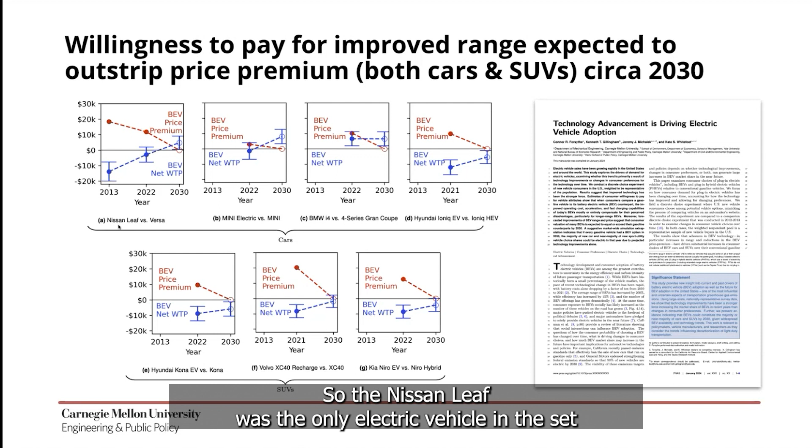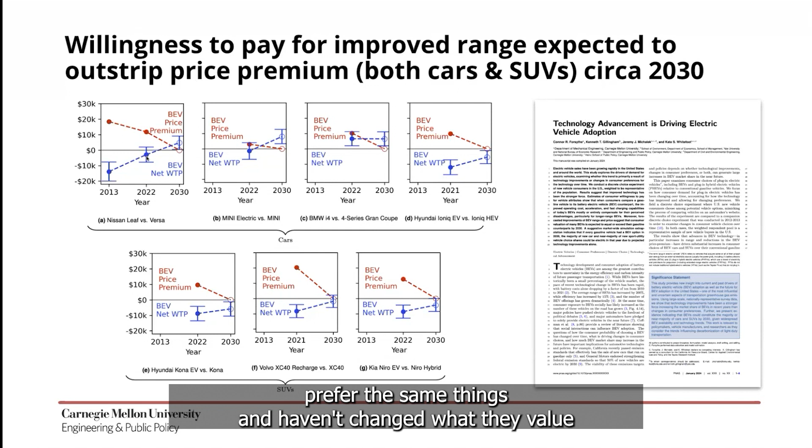So we did that with a bunch of specific vehicles and then for the full market. So the Nissan Leaf was the only electric vehicle in the set that was available back when we were doing the original study. And it improved from 2013 to 2022, even if the consumers prefer the same things and haven't changed what they value and what they're willing to pay for. Just the fact that the range has gone up and the cost has gone down increases the willingness to pay. The range going up increases the willingness to pay, and the cost coming down makes less of a gap.

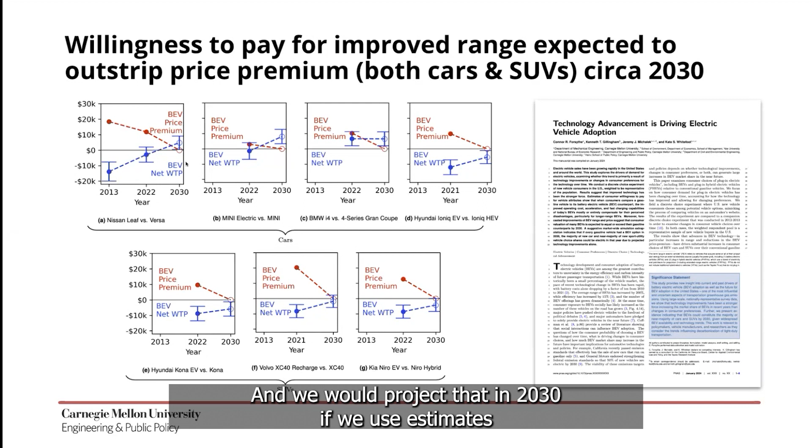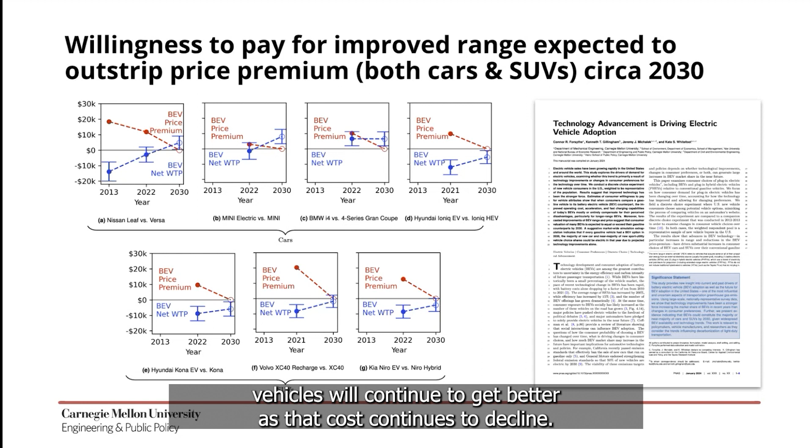And we would project that in 2030, if we use estimates from a recent National Academy consensus report, that the attributes of electric vehicles will continue to get better as the cost continues to decline. And we see a crossover point happening where the average willingness to pay in the population starts to exceed the price premium, and you get a lot more adoption even without putting in subsidies.

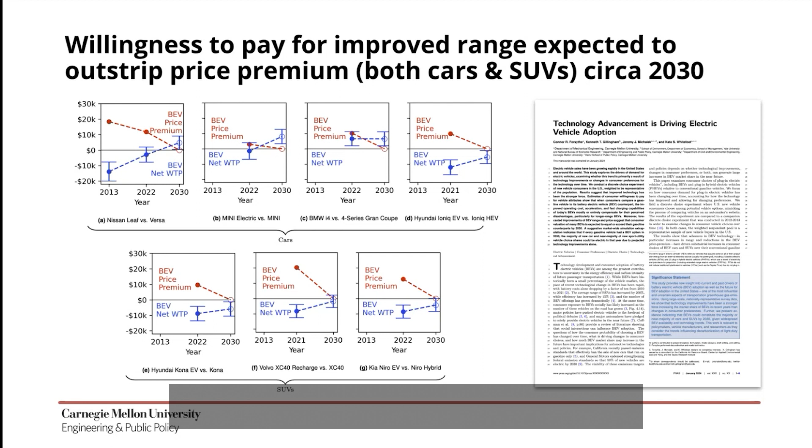And we looked across the entire market. Of course, what happens in the full market really depends on what kinds of electric vehicles are going to be available in the future and how many gasoline vehicles will continue to be available. So we just ran a scenario in which we assumed that every gasoline vehicle available would offer an electric version, and that the electric vehicle version would have attributes like what the National Academies project. Under that scenario and the preferences that we've measured, we see a majority or near majority of consumers of both cars and SUVs being interested to adopt electric vehicles.

We repeated the same exercise with pickup trucks, but this is a separate survey. We hadn't done the pickup trucks in 2013. We're just starting those now. Electric versions of pickup trucks have only just entered the market, and it's still too new to know what's going to happen using just market data alone. So we used, again, this controlled experiment approach. And what we do is once we get our responses, we use a latent class logit model, which is a way to categorize consumers based on patterns in their choices, not based on their demographics, but just based on similarities in what vehicles they're willing to choose over other vehicles.

And when we do this, we find that about 45% of our weighted respondents fall into a group that we call tech indifferent, because they don't really have strong preferences for electric over gasoline or gasoline over electric. If they offer the same attributes, they're pretty indifferent between the two technologies. So the key for this group is: is it offering better attributes? What's the range? What's the operating cost? What are the performance attributes? And for pickup trucks, things like hauling and towing capacity matter as well.

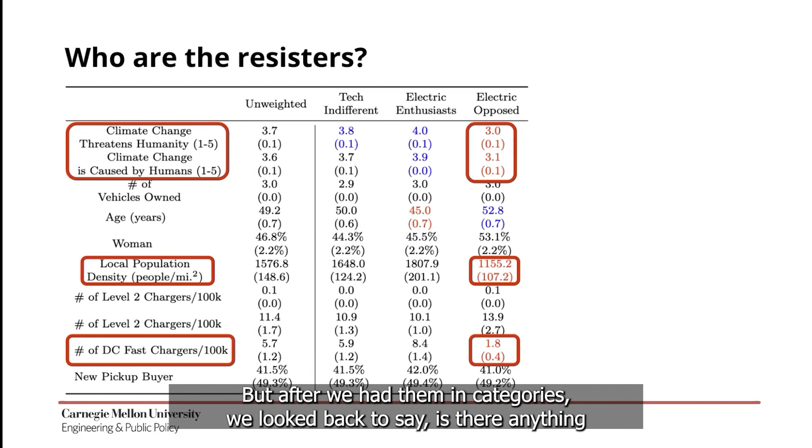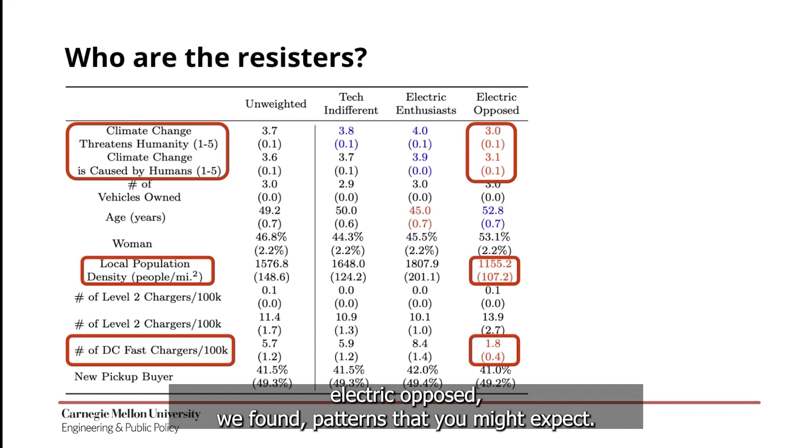And again, we didn't categorize these consumers based on their demographics. We categorized them based on the choices they made. But after we had them in categories, we looked back to say, is there anything in common about the consumers who fall into these categories? And for these electric opposed, we found patterns that you might expect. That group is much less likely to believe in climate change. They come from more rural areas, and there are fewer DC fast chargers in those neighborhoods.

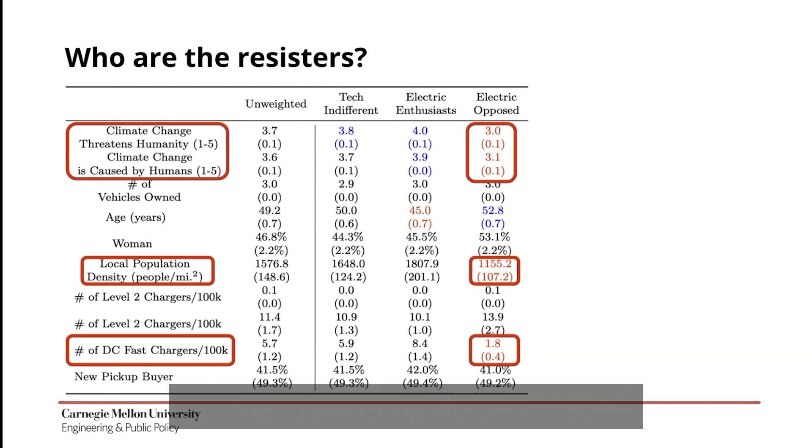And so maybe the one of those that we could have some control over is with the Inflation Reduction Act and the bipartisan infrastructure law and the rollout of new charging infrastructure. That may be a lever. I mean, it doesn't say causally that this will change anybody's mind, but that is certainly a factor that this group has in common. And so a change there could potentially be a factor that would sway some of these respondents.

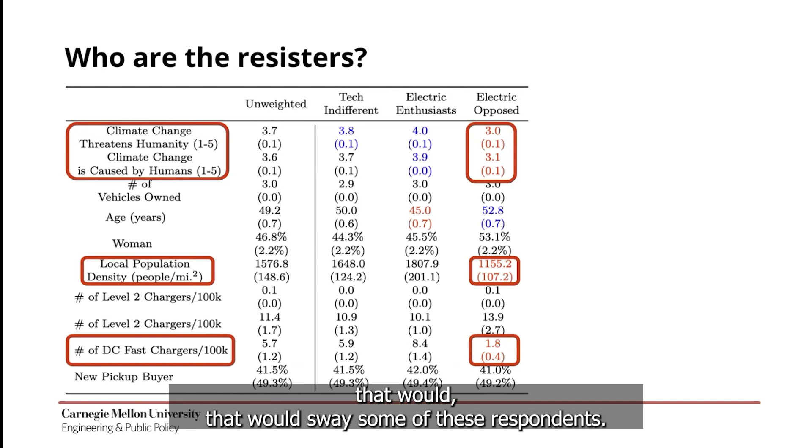So that was all for cars, trucks, and SUVs, which are bought by ordinary consumers. We've also been doing some work on electric delivery trucks. And for these, when you're buying a fleet of trucks, you're going to run the calculations, see what the net cost is going to be over the life. And so that's likely to be a bigger driver than kind of these willingness to pay weighing the attributes.

So we looked at economics, comparing diesel delivery trucks to electric delivery trucks in a bunch of different markets that differ in the geography, the kinds of deliveries they're doing, and what the tariff structure looks like, meaning how much electricity costs and how much the cost for electricity changes throughout the day. And so we find that electric delivery trucks can be competitive with diesel trucks today, but there's this really big bar in the first orange, electric unmanaged charging.

And the reason is because there's a lot of uncertainty. It really depends when you charge, where you charge. Is all the charging happening at the warehouse where you're loading up the goods? Is some of the charging happening along the route where you stop at a public charging station? And is it coordinated? Like, is all the charging at the warehouse happening right at the time that the warehouse has peak demand, and that will induce some demand charges from the power system?

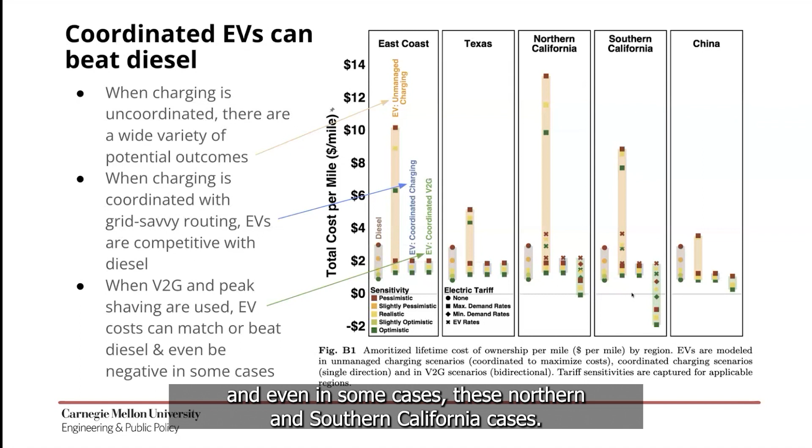And even in some cases, these Northern and Southern California cases, if you are strategic about when you charge and you use the vehicle to offset some of the facility's load right at the time that it's demanding its peak load, you can actually lower the demand charges from the power system, and you can end up with negative costs. This is from two things: from lowering the demand charges at the facilities where you're loading the goods, and also buying electricity at times that it's cheap and selling it back at times when it's expensive.

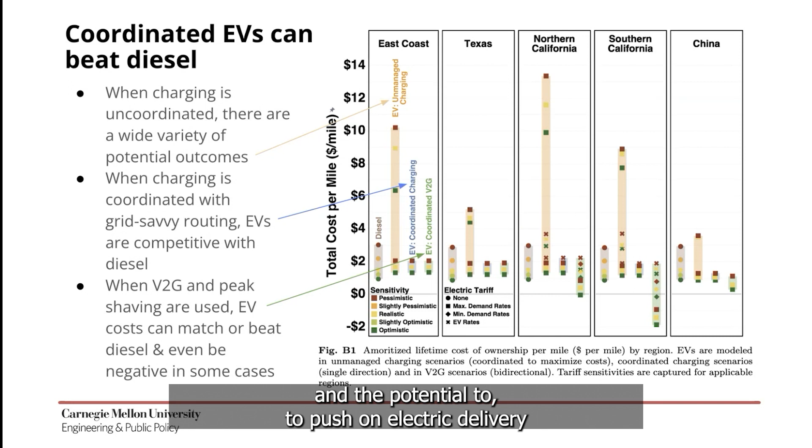And so this coordination of how you manage the delivery and the charging of an electric vehicle has a lot of potential benefits in some markets to even run at negative cost, where running the electric vehicle and doing the deliveries is free, and then you're getting all the revenue from the deliveries as well. So that points to both the importance of coordination and the potential to push on electric delivery in some of these markets first, where they could be particularly attractive.

Okay, and then the last topic I wanted to touch that's related to adoption is the EV battery resilience to fast charging. If you have an electric vehicle and you have a garage, most of us can install an electrical outlet in that garage and charge the electric vehicle there. And we won't really need public charging infrastructure very often, just kind of when we go on a long trip and we want to use a highway rest stop, that sort of thing.

But if you live in a multifamily dwelling, or even a single family dwelling that is in an urban area, you might be less likely to have any off-street parking. And if you don't, then you're going to rely on public charging infrastructure, which will probably include a lot of fast chargers, because those are the only ways to get your car fueled up at a speed that's anything like gasoline. So we have been testing a bunch of battery cells to see how they perform when you charge them really fast. There are three major types of lithium-ion battery chemistries used in electric vehicles today: LFP, which is lithium iron phosphate, NCA, which is nickel cobalt aluminum, and NMC, which is nickel manganese cobalt.

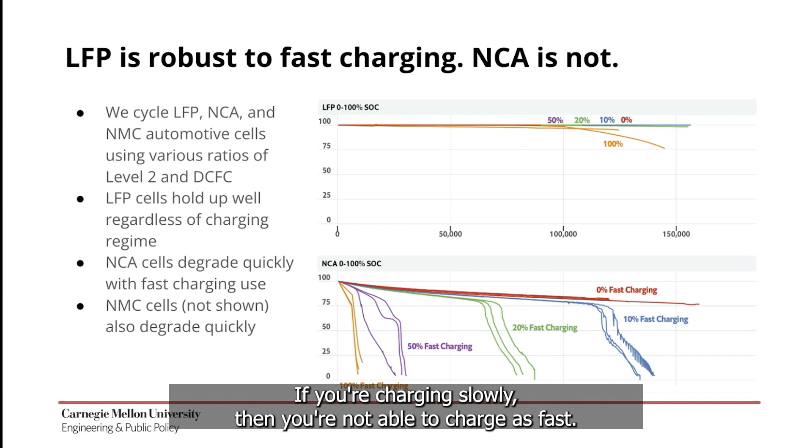So there's some real differences across the chemistries, and it could mean particularly high battery replacement cost. I mean, nobody would really replace the battery this many times, but if you were to use a nickel cobalt aluminum battery, fast charge it 100% of the time, and then over 8 years keep replacing the battery every time it dies, you could be spending over $100,000 in battery replacement costs. And so, doing partial utilization kind of limits that issue, but there's still a problem that can occur if you're doing too much fast charging. Whereas with lithium iron phosphate, none of the cases that we ran involved a battery replacement over 8 years because the batteries are just so robust.

So we're thinking about consumers buying a used electric vehicle in particular; the chemistry might really matter, but it's not easy to find out what kind of chemistry your vehicle has. And the public doesn't really have a ton of capacity to absorb this detailed information. And so we're trying to figure out how to use this information to help make sure that consumers don't end up with dead vehicles, especially those secondhand consumers who might not be as wealthy and are relying on it for transportation and relying on that public charging infrastructure.

So all of that was about some of the things we've been looking at with vehicle adoption potential. In part 2, I'm going to focus on environmental implications. And as I mentioned, I think my first environmental study about electric vehicles was maybe 2009. I may have had some in grad school too, but anyway, something like that. So I've been thinking about environmental issues of electric vehicles for a long time. And we have recent studies. It's interesting that it's not a fully solved problem yet. You'd think, well, we know what the environmental implications of electric vehicles are. There have been a lot of studies, but there's still some really important nuances that can swing the answer, and I'm going to talk about some of those today.

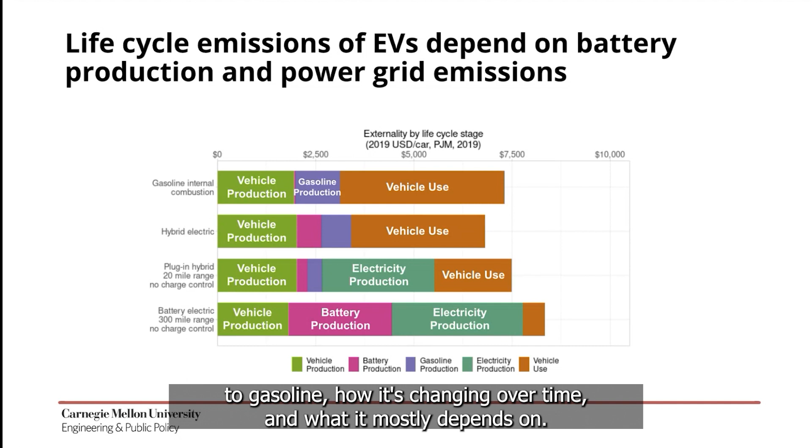But to give you a sense, that's the life cycle that we're thinking about. And because the life cycle relies so much on emissions from the power grid, it matters what the mix of the power grid is, and that varies a lot regionally.

This is a complicated thing to answer because the power grid is massively interconnected. There are tons of generators feeding into the network and tons of users consuming electricity from the network. And it's not like the electrons get traced from one generator to one user. They're all in the same soup. But that soup isn't homogeneous.

But if you buy electricity in San Francisco, that doesn't mean power plants in San Francisco are responding to the load. It's power plants in the entire network. It's what is the cheapest way in that moment to increase generation in order to meet the new load from that electric vehicle. So those are the kinds of things that we've done a lot of studies looking at.

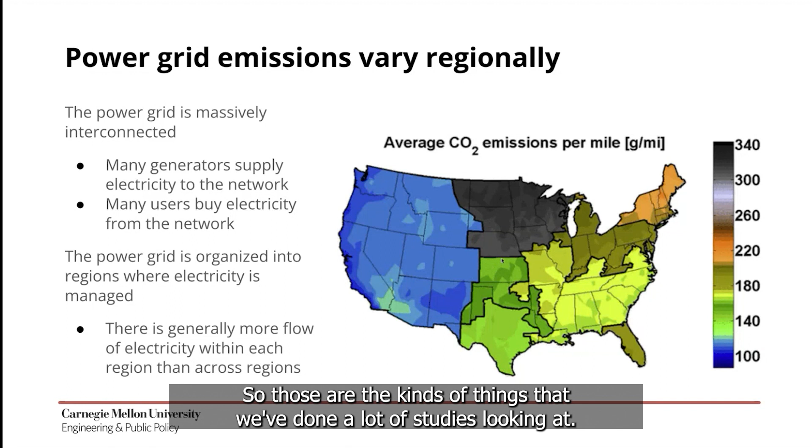Historically, the attributional was definitely most common. You would say something like, well, if electric vehicles are X% of the load of the amount of electricity that we're generating, then assign them X% of the emissions from generating that electricity, which makes a lot of sense.

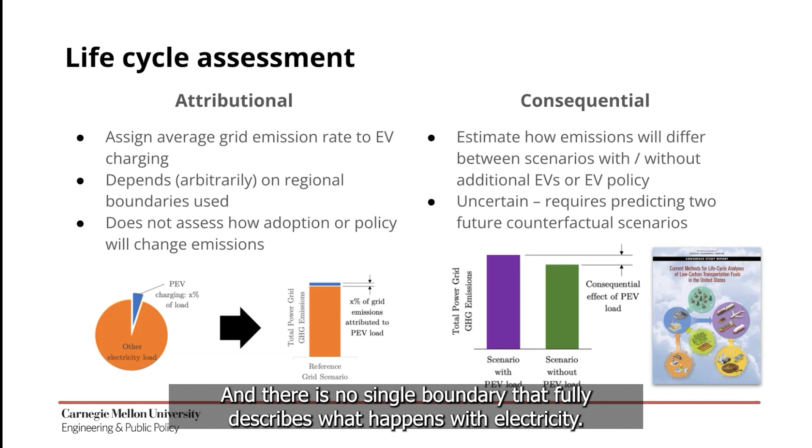However, that answer turns out to really depend on what we choose as the region of study to divide the emissions over. And there is no single boundary that fully describes what happens with electricity. Like any boundary you draw, electricity flows across that boundary. And so you can get really different answers here depending on where you draw the boundary.

And the most informed studies will usually use boundaries that are meaningful from a power grid perspective. So just saying, what are the power plants near my city or in my state isn't really that relevant because it has more to do with which power plants are the ones that respond to new load in your area of the country. So the other way to think about this is consequentially.

And what you do there is you have to estimate what the power system would do in two different scenarios. One where you don't have that extra electric vehicle load, and the other one where you do have that extra vehicle load. And then you look at the difference in the emissions across those two scenarios, and you say, well, if I add that PEV load, that's what's going to change in terms of the emissions. So that is consequential.

And what the consensus report says is that both of these have really valid reasons to use for different purposes. But if you want to do policy analysis, like if you're considering setting a new policy and you want to understand what the effect of that policy would be, you need a consequential analysis for that type of question.

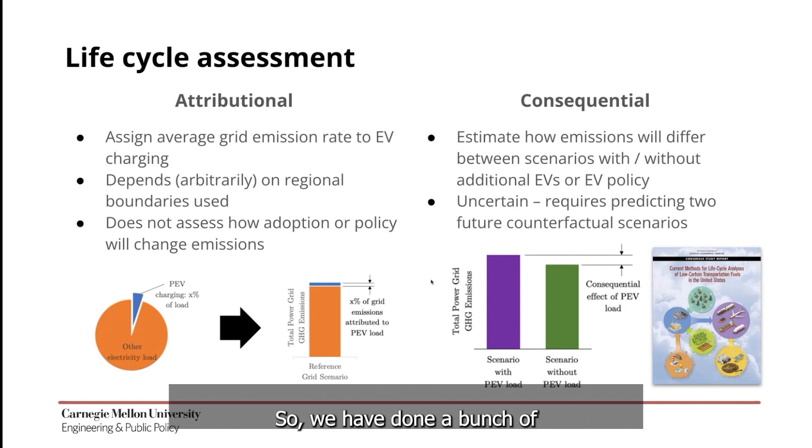So we have done a bunch of consequential studies on electric vehicles, and I'm going to summarize key results from a few of them. So these first two were both published earlier this year. And I'll just do one slide for the first one, which is looking across the country at how different electric vehicles compare to different gasoline vehicles on life cycle greenhouse gas emissions.

And of course, as we discussed, it depends where you are regionally, because the power grid looks different regionally. It also matters regionally because temperature matters. Cold weather, for example, makes all vehicles less efficient, but it makes electric vehicles especially less efficient. And so the relative competitiveness of electric vehicles is worse when it's colder.

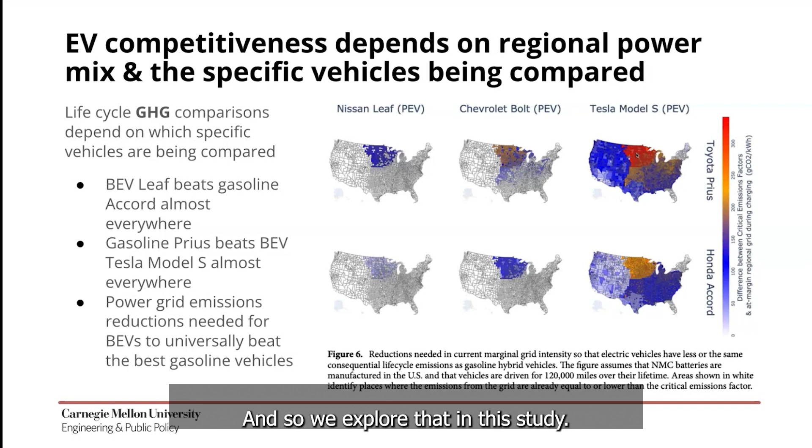So one of the things that's tricky about looking at all these life cycle studies is they tend to compare electric vehicle to gasoline vehicle, but depending what you choose as your representative electric and gasoline, you can get really different answers. And so we explore that in this study. That prior map, though, was only for greenhouse gas emissions. Greenhouse gas emissions are certainly a primary area of focus, but turns out they're not all that matters. Air pollutants also really matter.

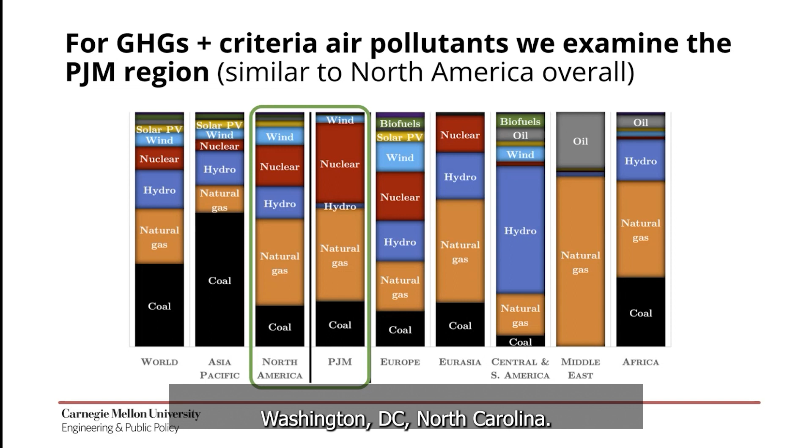And if we really want to dig in, we're going to have to narrow scope and focus in on a particular region so we can model it in more detail. So that's what we did with the PJM region, which is the largest regional transmission organization in the United States. It serves 13 states and the District of Columbia. It spans from Chicago to Philadelphia, Washington, D.C., North Carolina. And the power grid mix in PJM is similar to North America as a whole.

And we had done a study of this some years ago using grid data from 2010. And we had found that in this PJM region, an electric vehicle would create quite a bit more air emissions externalities, meaning the cost of damages caused by those air emissions, than a gasoline vehicle. And that was primarily because of sulfur dioxide emissions from coal-fired power plants.

When the electric vehicle plugs in, power plants have to increase generation to supply the new load. The ones that increase that generation tend to be fossil fuel plants, and a healthy portion of them in PJM are coal. And the coal releases sulfur dioxide, which reacts in the atmosphere to form fine particles. And then people downwind breathe those particles and get increased cases of cardiovascular and respiratory disease. So in quantifying all of that, we actually found the electric vehicle to be doing worse back then.

But we predicted, yes, a lot of coal plants are going to be retiring, and as they retire, this comparison is going to become much more competitive. So what we did this year, published this year, is update that study. And the most recent grid data we had available for all the information we would need to fully model the system was 2019. And we did see a huge improvement as coal retired. And we anticipate looking out to 2025, based on what plants were scheduled to be built or retired, that we would continue to improve and that electric vehicles would become comparable to gasoline vehicles in PJM.

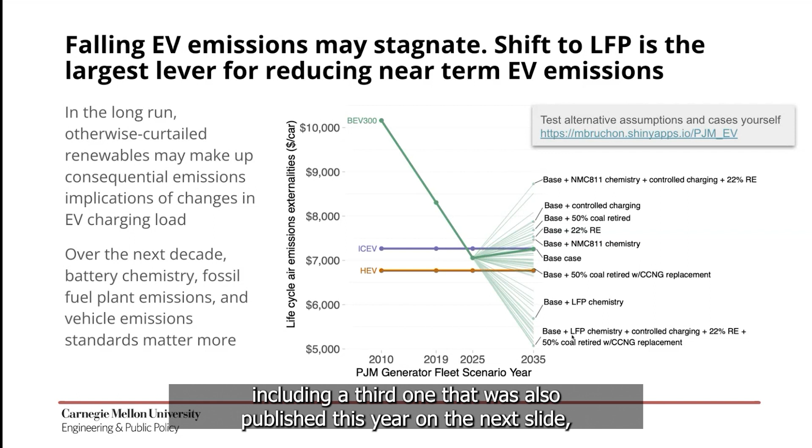And that's kind of a neat thing. In fact, it turns out we've got a few studies, including a third one that was also published this year, on the next slide, that are all sort of pointing us toward this lithium iron phosphate chemistry as being a good thing for electric vehicles, because it's more robust to fast charge, as we talked about, so it can last longer, including for the second owner. It has lower life cycle externalities. All of the cases in our scenarios that had the lowest emissions over the next decade involved switching to that lithium iron phosphate chemistry.

And that's primarily because nickel mining involves a lot of sulfur dioxide emissions as well, although that varies a lot depending on where we get our nickel. There's some nuances there that I'm happy to talk about in the Q&A if you have questions.

And then the third is a paper I won't talk about today, but just to mention, we have another paper out this year in Nature Communications that lithium iron phosphate also has fewer supply chain disruption pathways because it only has one critical material, lithium, and doesn't need a ton of that. Unlike the other nickel-based chemistries that use nickel and cobalt and maybe manganese. And so lithium iron phosphate has fewer pathways, like fewer types of geopolitical or natural disaster type disruptions that could interfere with our ability to keep making these electric vehicles. And so that has some robustness advantages as well.

So all of the studies that I've been talking about so far with electric vehicles and all of the ones I've published so far look at how adopting electric vehicles will change the way the power system generates electricity to charge. But we have always been assuming that the power system itself, like the kinds of generators we have, are exogenous, that we already know what they're going to be, and electric vehicles aren't going to change which power plants we build.

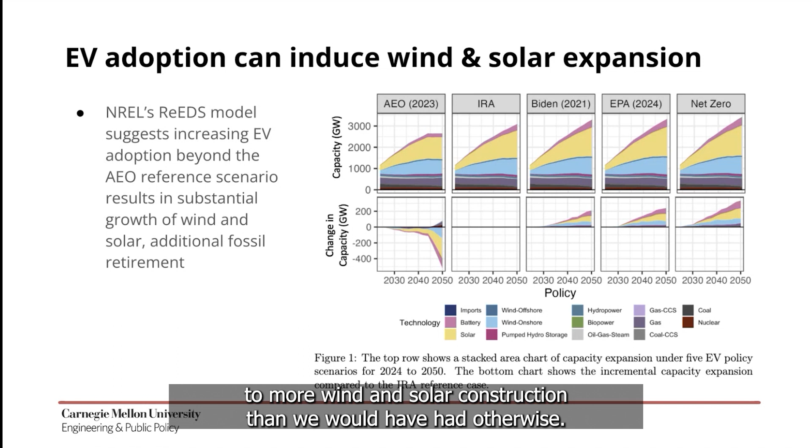So there's a really good story here. And in fact, that story gets better if the electric vehicles have flexible load. I'll explain what that means.

So actually, let me explain before I show this complicated chart. So what I mean by flexible load: an inflexible load would be a load where when I get home from work, I plug the car in and it starts charging right away. That's what I have now. I have a plug-in hybrid in the garage. And when I plug it in, it just starts charging. And so if I get home at 6 o'clock, then it starts charging at 6 o'clock.

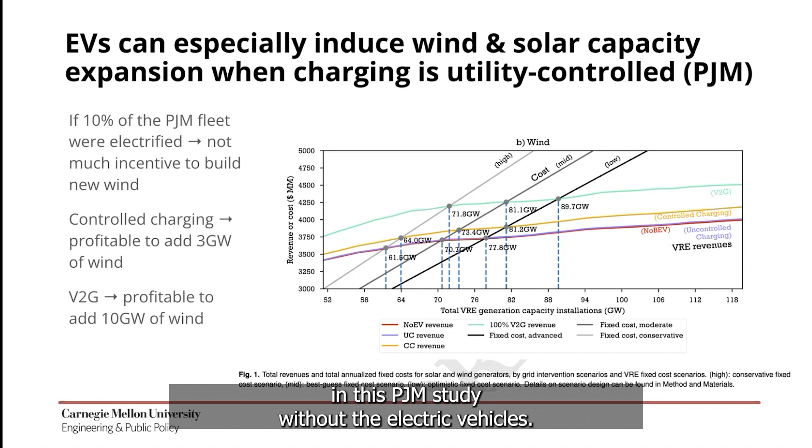But the cool thing that happens when that charging is controlled, or in particular, when you use vehicle to grid and it's a bi-directional control, is that you end up building so much more wind and solar that the net emissions in the whole power grid actually go down. You add new load and the power system has to produce more energy to meet that load, and yet the total emissions actually decrease instead of increasing. That's because if the economic incentives are there and you build that additional wind, the wind can charge not only the vehicles, but supply energy for other parts of the economy as well.

So again, these last two studies are still preliminary. They have not gone through peer review yet, but these early results are quite exciting, and we'll be getting them through the review process this year.